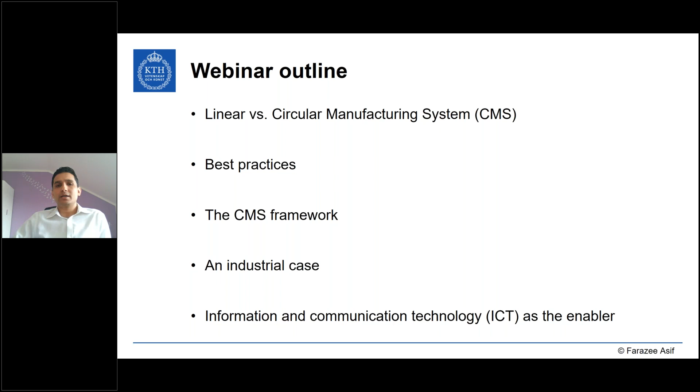So this is the outline of our presentation today. I will give you some brief information on what the differences are between linear and circular manufacturing systems, introduce some best practices, and then our research findings in the form of a circular manufacturing framework. And then I will introduce you to an industrial case. Right now we are working together with Signifikant. It's an EU project. And then finally, Ruud will explain how information and communication technology, or ICT, can enable implementing a circular system or becoming circular.

To start with what a circular system is, we need to understand what a linear system is. Briefly, a linear system means that you take resources from Earth and use those resources in different manufacturing processes to make goods, and then use those goods in our everyday life to fulfill different purposes, and when we are done, we dispose of those to nature. And this is the approach industries have been using for centuries, and it is built upon the assumption that resources are infinite, and the waste carrying capacity of nature is also infinite. But we all know neither of this is true, and the linear system is not sustainable.

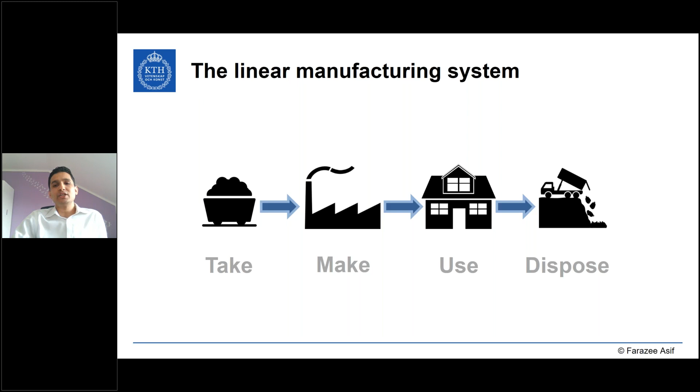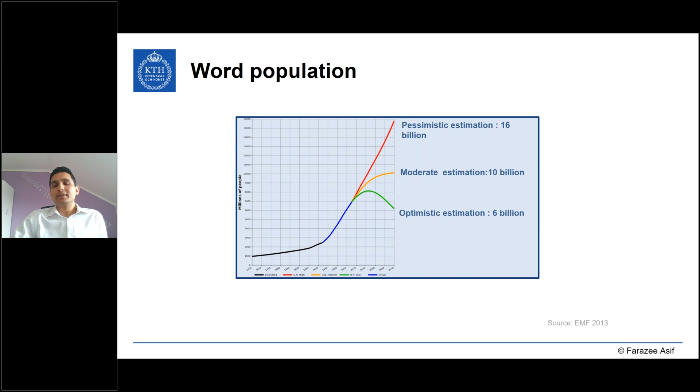A similar trend is seen in price volatility when it comes to commodities, which also shows that in the last two decades the price of necessary supplies for prosperity is getting more volatile. And this is also another sign of scarcity. It shows that on one side we are consuming resources as the population is growing, and at the same time we are creating uncertainties in terms of getting the supply of necessary resources for our prosperity.

Now, what is the way forward then? How do you deal with this issue of resource scarcity and price volatility, etc.? At least to us, the way forward is the circular manufacturing system.

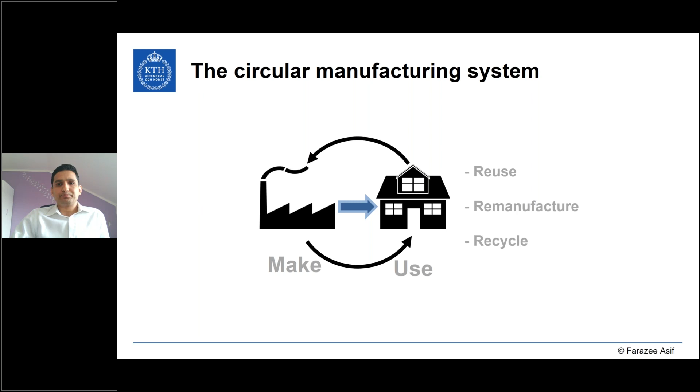Prioritize reuse and remanufacturing process, and when it is not possible, then we do recycling. Now, as you can imagine, reuse can be done making a shorter loop, perhaps without involving any industrial processes. And as a result of this, the value recovery is highest, and conservation of resources is high as well.

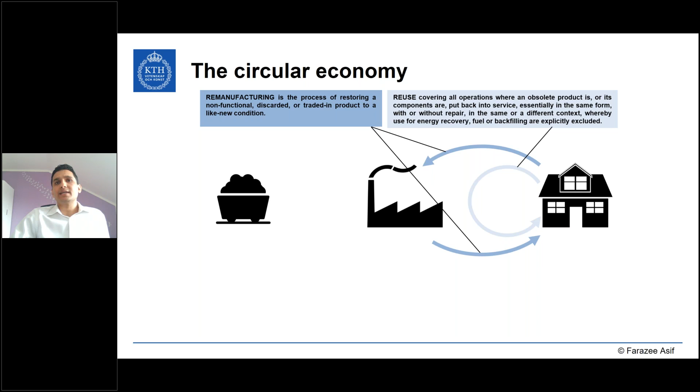Remanufacturing, on the other hand, involves industrial processes. It requires additional resources to remanufacture a product, which means the resource conservation is a little bit lower than reuse. But on the other hand, the product that comes out after remanufacturing is of much better quality. It is as good as new. So remanufacturing is a well-established process when it comes to ensuring high quality with minimum resources.

And recycling is a process of material recovery. So this is the last resort that we suggest. So if we want to conserve resources, we need to prioritize reuse and remanufacturing, and when it is not possible, then we recycle to recover value. And this is what a circular economy or circular manufacturing system is in our context.

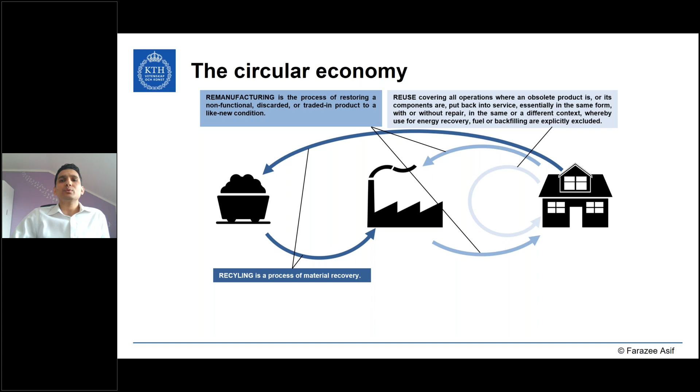Now, apart from resource scarcity and the environmental aspect, there is economic potential for industries to tap. Studies have shown that up to 90% of the value of a used product can be recovered through various value recovery processes. And if you look at the automotive industry, there are studies which show that in many cases, from automotive components we can recover embedded value in this ratio. For example, in some automotive components we can recover 88% of the value embedded in the product as labor, 85% plant and equipment, 80% material and energy.

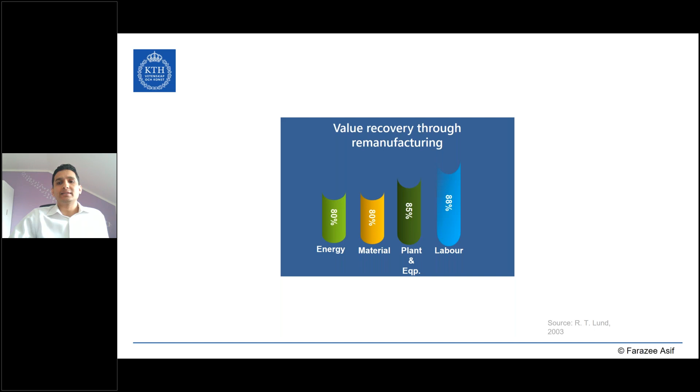And these numbers are not just the outcome of research projects and scientific papers. There are best practices. There is evidence that companies are capitalizing on the potential that I just mentioned. Now, these are some best examples that I sorted out.

From the automotive industry, we have Renault, which is remanufacturing a wide range of automotive components, and by doing so, they're recovering quite a lot of resources, and they are able to offer products at 50 to 70% lower price than new components. And through these activities, they are creating revenues of $270 million annually.

Then at the bottom, we have Caterpillar, which has been remanufacturing heavy machines since 1973. They're also able to offer products at 30 to 60% lower price after remanufacturing in comparison to new products. And by doing that, they recovered 154 million tons of material in 2015, and 18% of revenue is coming from these activities.

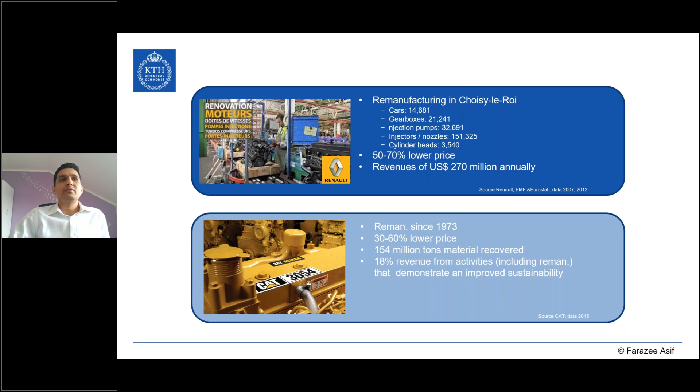In the electronics industry, we have Ricoh and Xerox, and these companies are also doing similar activities. In the case of Ricoh, 170,000 copiers were collected in Japan in 2014. And by doing that, input of new material was reduced by 8,900 tons, and their green line product variety has had rapid growth, which started with 5% in 2012 and 2013, and now is up to 20%.

Xerox has also had an asset recovery program since 1984. This is a similar example. As I mentioned, it saves a lot of material, energy, CO2 emissions, water consumption, etc. So despite having such a good outlook from both an economic and environmental point of view, unfortunately, the remanufacturing intensity in Europe is very low. If we compare it with new manufacturing, only 2 washing machines are remanufactured for every 100 washing machines manufactured, which shows that we are not tapping the huge potential that we have.

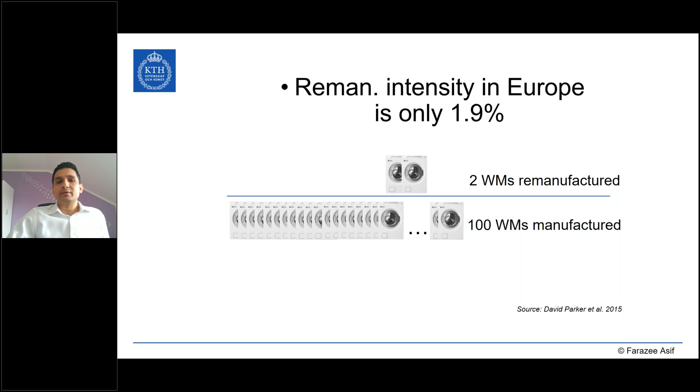So this made us think, okay, what are the problems hindering the industrial uptake of reuse and remanufacturing, and how can we facilitate this better? We have been doing research on this topic since 2010, and our research findings can be summarized in four points, which we call the circular manufacturing system framework.

Now, the first point is that reuse, remanufacture, and recycling activities are an integrated part of the manufacturing system. We have to ensure this because we cannot just produce products and assume that someone else will do value recovery activity for us. It will not work. The second thing is that we need to design intentionally for reuse, remanufacturing, and recycling. It should not be done by chance, as it is in the conventional approach. We cannot design a product which is not designed for value recovery and send it out into the market; value recovery will not work if we do not design intentionally.

And then the third is that the implementation needs to be done in a wide range of products at an industrial scale, because the magnitude of the challenge that we are facing with resource scarcity cannot be solved with 1% or 2% of the market share that is done by remanufacturing activities. We need to scale up remanufacturing activities to the same level as the manufacturing activities that we have today.

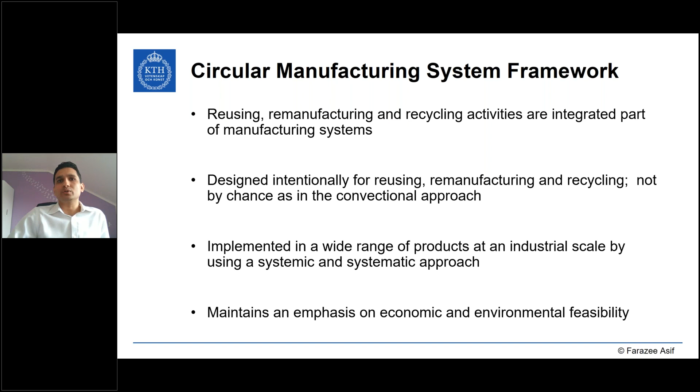So these are the four main points that our framework suggests: we need to make value recovery part of our manufacturing system. We need to design for it, we need to implement it at an industrial scale, and we need to emphasize economic and environmental feasibility.

Now, our research has also shown that for a company to become circular, a systemic and systematic approach needs to be taken, and they need to work with several areas of business. Now, the first thing that we need to work with is the business model. The conventional sales model is more likely to fail if we want to keep control over the products that we want to bring back for value recovery. Alternative business models such as leasing or function-based service models, where the function of a product is offered as a service instead of the product as a whole, are more appropriate for this sort of circular system and retain ownership.

Now, once you have designed a business model that is more appropriate, you also need to adapt the product design accordingly, because a product that is designed for sales purposes will not work for leasing. In leasing, you need a more robust product, because you do not know how the consumer will treat your product. As you may have heard the expression, people say that the fastest car in the world is the car that is on lease. So you need to consider that when you change your business model, the product needs to be designed accordingly.

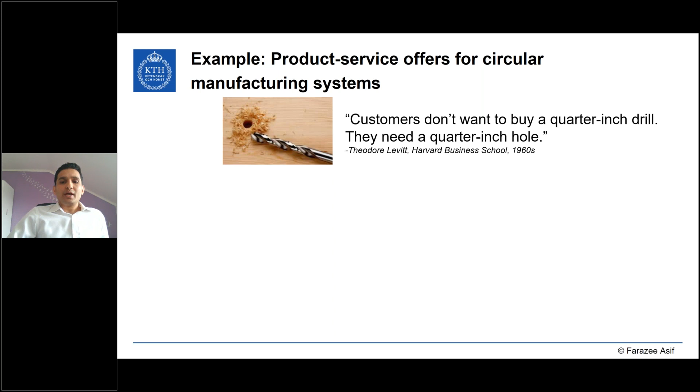So, having said what circular product service offer means, we move on to the next slide, which says there are a range of business models that we can work with in order to maintain ownership of products. In this case, there are three main types of business models that can allow us to retain ownership of the product. One is buyback, the other one is leasing, and then functional sale, which is pay-per-use, so to say.

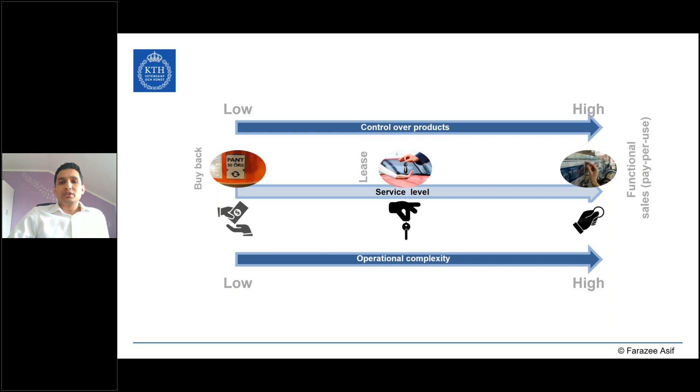Now, these are the three major types of business models that we work with, but there are a couple in between. We suggest going for functional sales, which is more appropriate for circular manufacturing systems, but it also brings some challenges. For example, if you go to a pay-per-use model, the desired service level for the customer will be higher, so the customer will expect more service from you. This also means the operational complexity will increase. So if you move from a linear to a more circular business model, more complexity will come. Now, as I mentioned, the research is not complete unless we do testing in an industrial case.

So right now we are running an EU-funded project, which is called ReCiPSS, which stands for Resource Efficient Circular Product Service Systems. And this is a Horizon 2020 framework funded project. In the project, we have two industrial demonstrators or showcases that we would like to bring forward as the success story. And one of the case companies is Gorenje, one of the leading home appliance manufacturing companies in Europe. And the product that we are working with is a washing machine.

Now, among other things, the higher level objective of the project or the case study is to implement 300 washing machines with pay-per-wash offering in 4 European countries. And as part of the design, we would like to develop a long-lasting smart washing machine that is robust, but can also communicate through internet in real time. And we are also taking up a challenge that the same machine will be refurbished at least twice to serve 3 life cycles, where each life cycle is 5 years.

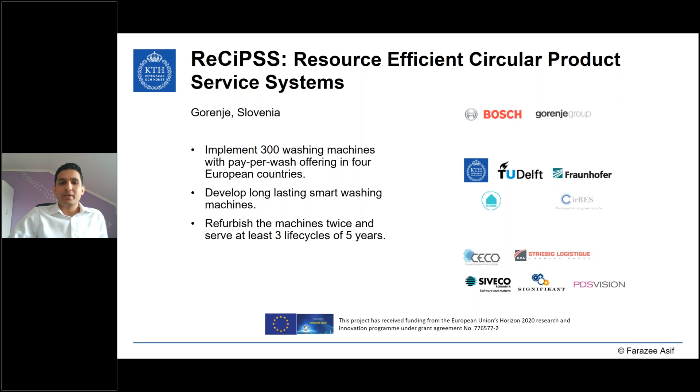So what we are trying to do in this project is validate or test the framework that I have just presented. Now, you can probably already imagine that when you go to this sort of business model, it becomes complex, and suddenly the manufacturers need to answer a lot of questions that are perhaps not that relevant in case of conventional business model. For example, you need to know how is the machine doing, when to do the next service, what type of service needs to be done, where is the machine, how much should I charge the customer, and the customer would like to know how much I need to pay, etc.

So these are the questions that are usually not very relevant in case of conventional business model, but suddenly become very important. And the answers to these questions need to be available in real time, which puts additional demand on our system. Similarly, the collaboration among different partners becomes extremely important in this business model. So inter-organizational collaboration is one of the keys to success of the circular system.

And as you can imagine, when you have this sort of business model, then you need to ensure that the partners are collaborating properly. For example, the logistics companies know when the products need to be brought back for remanufacturing. The service personnel know when to go for service operation and make sure the product is not breaking down. So this sort of collaboration is needed. So the complexity in product and also the complexity in service need to be handled.